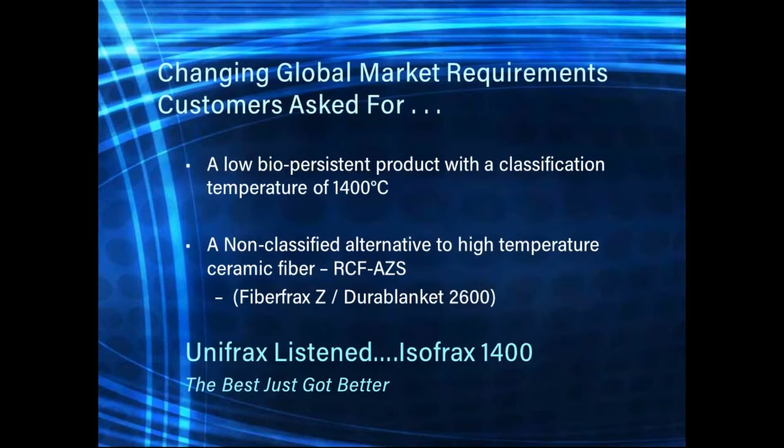What we've heard from you and also from your end customers is that there's been a need in the marketplace for a low biopersistent product with a higher classification temperature, something that could be considered a true low biopersistent alternative to alumina zirconia silica ceramic fiber, which I'll refer to as AZS fiber. So basically you asked and Unifrax listened, and now we're excited to have this product for the many higher temperature applications across all markets.

A little bit about the commercialization of this new product. Isofrax 1400 is officially being launched today, and as of this launch date, the material will be offered in many blanket and module forms. This new product, with all of the same benefits of our Isofrax 1260C, but also with the higher classification temperature and operating temperature, will replace the Isofrax 1260C blankets and modules. The Isofrax 1260 bulk fiber and the products made with the bulk will still be maintained as part of our low biopersistent product line.

Chris and I are going to speak to you today about six points relative to the new product launch. This is our first low biopersistent product with a true 1400 degrees Celsius classification temperature. Isofrax 1400 also has better thermal stability at higher temperatures, giving you a product you can use with confidence.

In addition to this enhanced temperature capability, this blanket also has better strength and better handleability, which is really important. And of course, as a low biopersistent material, this product continues to provide zero classification worldwide. Finally, and very important to you, is that it offers the same trusted and proven track record of all of our Unifrax insulating products.

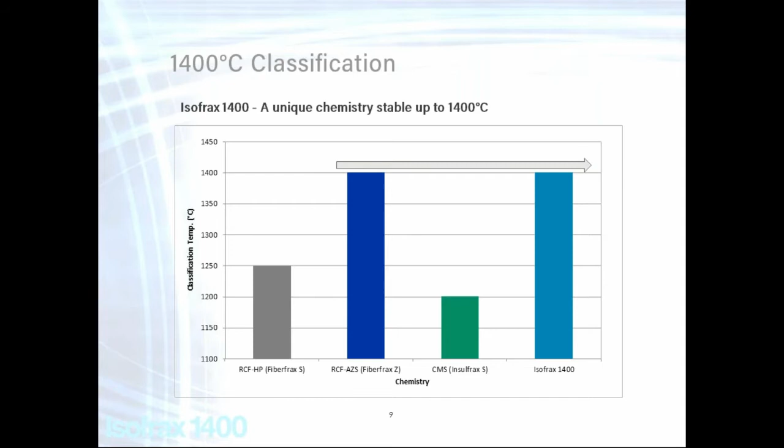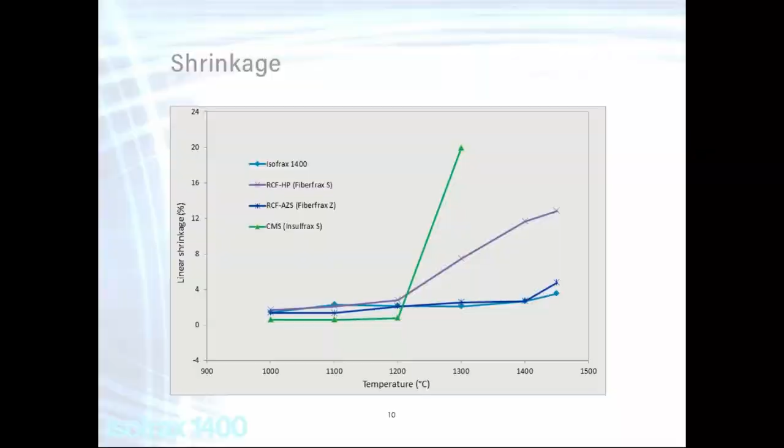Since the real performance of a fiber is not just based upon the shrinkage alone, I want to move on and talk to you and demonstrate the high temperature stability of this new fiber.

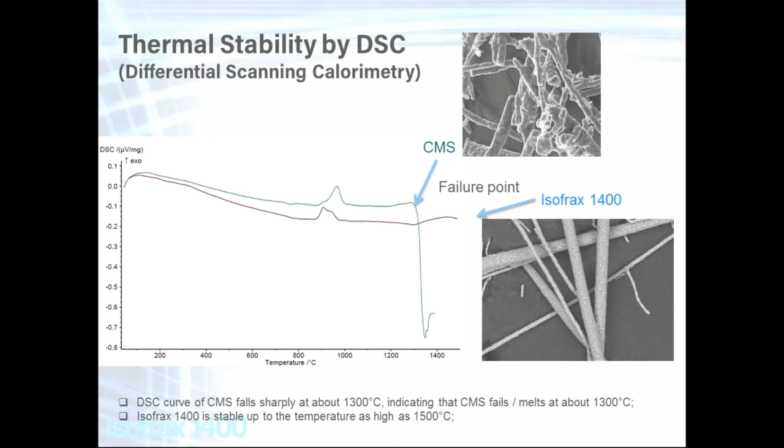Unifrax first introduced Isofrax fiber as an improvement to CMS fibers, low biopersistent fibers on the market, to help meet the full temperature requirements of a standard ceramic fiber. So now with the development of the new improved Isofrax 1400 blanket, the use temperature of this fiber has been increased even further to meet the 1300 degree temperature requirement, making it equal to that of an AZS ceramic fiber.

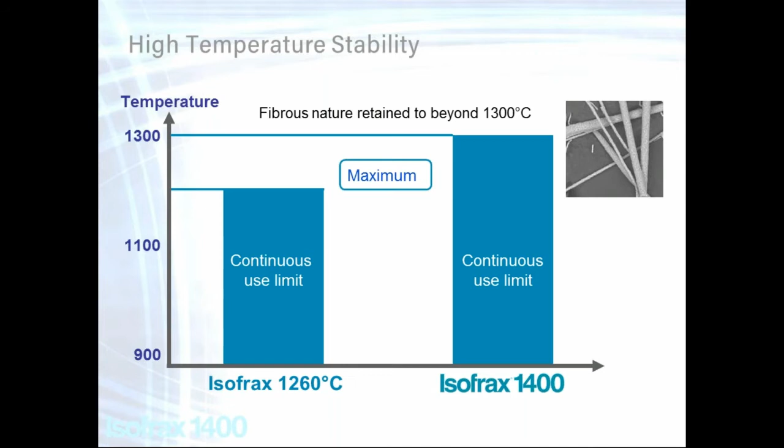Look again at the photo on the right that shows the individual fibers at use temperature. This will show the structural integrity of the fiber is maintained even at the higher use temperature: no breaks, cracks, inclusions, or puffiness. This fiber continues to be stable and the blanket maintains its strength and integrity.

So now we've talked about how Isofrax 1400 exhibits a marked improvement in shrinkage and operating temperature versus the CMS fibers, and even as compared to our Isofrax 1260 blankets and modules. But what does this really mean to you, our customers? We now can offer you a low biopersistent product which you can use at those higher temperatures with confidence.

It's well known that low biopersistent fibers don't have the same high melting temperature of ceramic fibers. And we also know, I hope, that you would never design a furnace using any material of any chemistry right at its melting point. But the higher melting point of the Isofrax 1400 does improve the safety margin of the furnace lining. This is because it increases the temperature where you would see the complete failure of a furnace lining in the event of an overfire.

This high confidence level that you get with the Isofrax 1400 ties back to all of those properties that we discussed so far. And with the introduction of this product, we've really effectively increased the continuous use temperature and classification over that of other CMS fibers. But also, we've developed a low biopersistent fiber that truly has the highest melting temperature available.

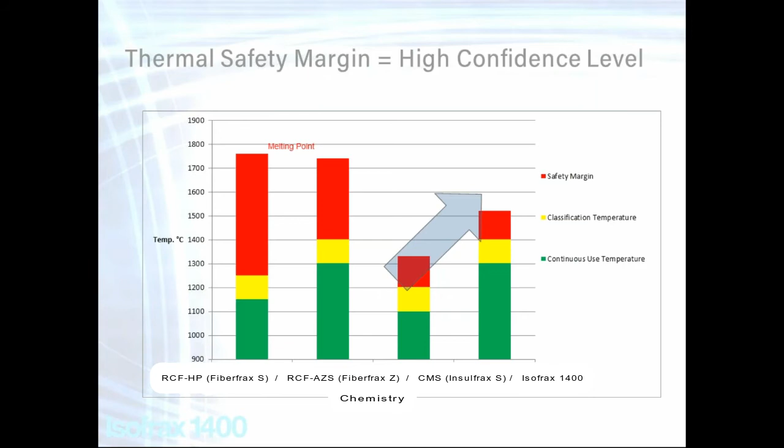It's my pleasure to discuss with you some of these advantages of the new product. I would like now to hand the presentation over to Chris McMahon, who can provide some additional information on the Isofrax 1400. Chris?

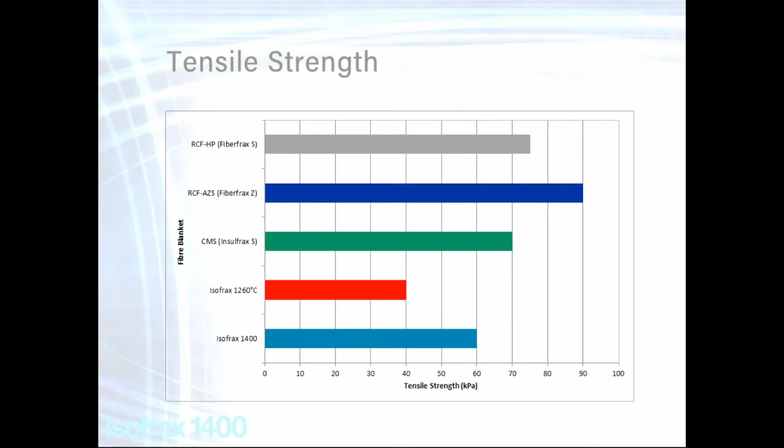Thank you, Jane. I would now like to talk about the tensile strength of the new product. Customers have told us that Isofrax 1400 is easier to handle, cut, install and make modules. Why is that? Well, the tensile strength of the new product has been significantly improved compared with the previous version of the product, Isofrax 1260, as can be seen in the chart. We now have a stronger blanket for conversion processes and final installation.

Now, let us talk about the health and safety compliance of the new product. All current Unifrax low biopersistence fibers have passed the Note Q exoneration test for low biopersistence. The tests were conducted by qualified independent laboratories, and Unifrax low biopersistent fibers are therefore not classified as hazardous and do not require a hazard label.

Many of you listening in today will know that Isofrax has been the class-leading low biopersistent thermal insulation on the market since it was launched 18 years ago. Isofrax has a proven track record. We can provide a number of references for Isofrax thermal insulation covering a wide variety of applications in industries such as steel, aluminium, ceramic and chemical processing industries.

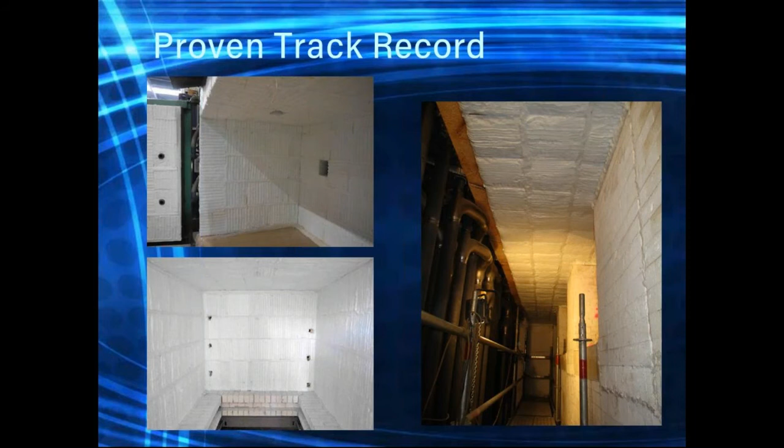The new Isofrax product may still be used for the same applications as before, but now also the higher temperature applications where only 1400 grade RCF AZS fibre was previously deemed appropriate. The number of application stories and references for Isofrax 1400 is growing, including some examples showing furnaces operating at 1260 degrees Celsius and beyond.

And now, just a comment about thermal conductivity. The thermal conductivity of the new product is comparable with that of Isofrax 1260. To repeat what has been mentioned earlier, the new Isofrax product is a real alternative to 1400 grade RCF AZS insulation in high temperature applications.

If we look at the chart, when comparing heat flow measurements of blanket and modules in various scenarios, one can see from the hot face and the cold face temperatures that the performance of Isofrax 1400 is almost comparable with that of RCF AZS insulation in both blanket and module formats.

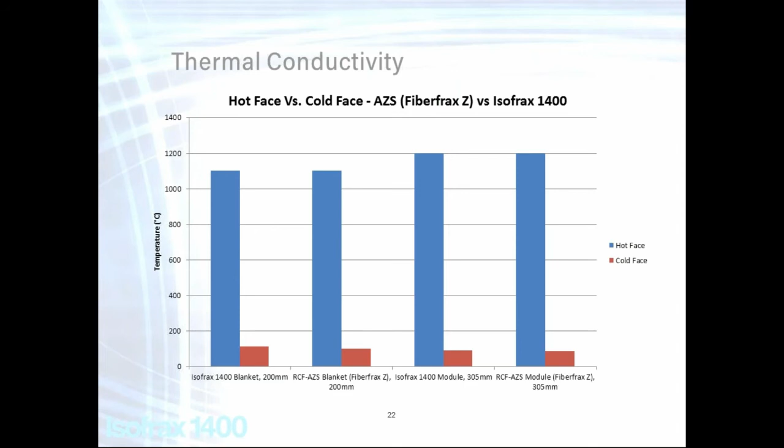Unifrax now offers the broadest range of in-house manufactured high-temperature insulation wool products in the world, including Fiberfrax, our refractory ceramic fiber, otherwise known as alumino-silicate wool, Insulfrax and Isofrax, our alkaline earth silicate range of low biopersistent materials, and Saffil, our range of high-temperature polycrystalline fibers.

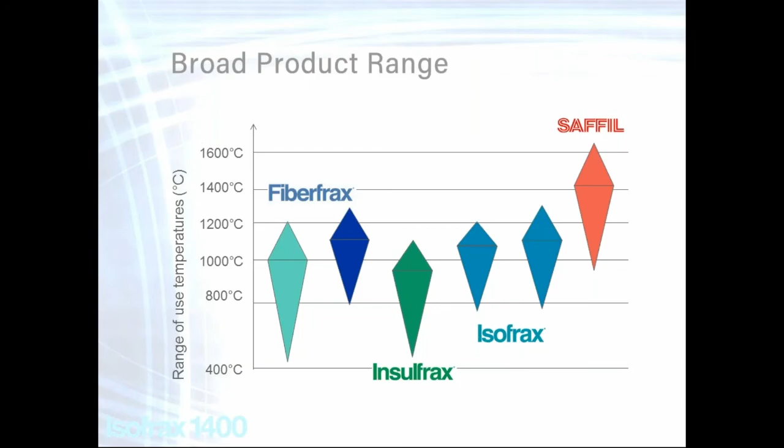And now, just a final recap. Some major points to remember from the webcast today are as follows. Isofrax 1400 has a classification temperature of 1400 degrees Celsius. The new product also has a higher maximum use limit of 1300 degrees Celsius. Isofrax blanket and module products now offer our customers the first available and true alternative to 1400 grade RCF AZS thermal insulation.

Unifrax products are available on a global basis. We have manufacturing plants, sales offices and application engineering teams around the world, ready to support you in providing thermal management solutions today and into the future.

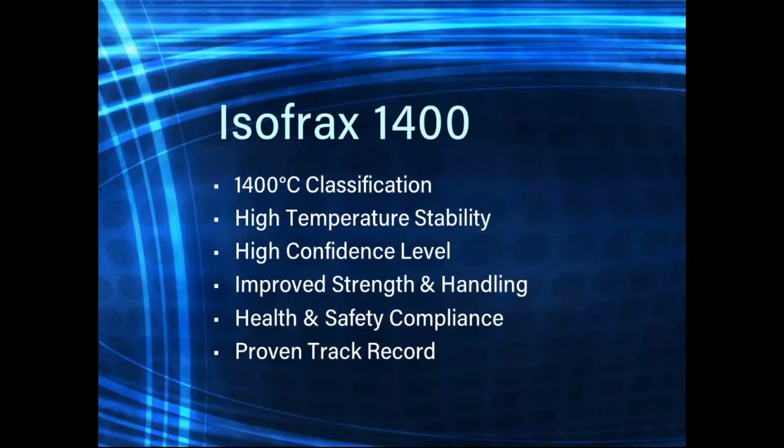Over the years, many LBP offerings have been introduced to the marketplace by different manufacturers with many different performance benefits. Relative to competitive products, what are the unique technical properties of Isofrax 1400, which are the basis for Unifrax's confidence and claims for the product? Jane, would you like to take this first question from our audience?

Sure, Deb, no problem. That's a great question. When you select a fiber for your engineered furnace lining, you should really consider all of the product properties. So you want to look at the whole picture. You want to look at things like the material use limit, the tensile strength of the material, the insulating value, of course the expected shrinkage, but also the fiber strength and the integrity after it's been fired, as we discussed earlier. I would say that the uniqueness of this product is that all of these properties come together to dictate the expected performance of your furnace lining.

So taking all these factors under consideration, the Isofrax 1400 is the best LBP fiber currently on the market. Other competitive products might look to be superior relative to a single performance aspect, such as shrinkage alone or thermal conductivity. But when all of these variables are evaluated, the competitive product may potentially have some significant shortcomings.